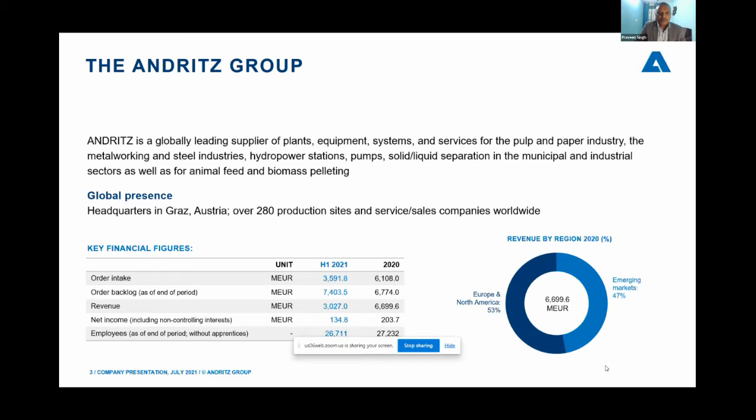Andritz is headquartered in Graz, Austria, and we have over 280 production sites and sales and service companies worldwide. And we did an order intake of about 6 billion last year in 2020, and sales was approximately 6.7 billion globally when we talk about the Andritz Group. So we are mainly operating in pulp and paper, hydro, metal and separation areas.

Pulp and paper is one of the biggest divisions within Andritz, and we have a share of about 48% from pulp and paper. Hydro is about 22%. Metal industry, we do about 19%, and separation about 11%. So this is something about our group and the business areas where we are working.

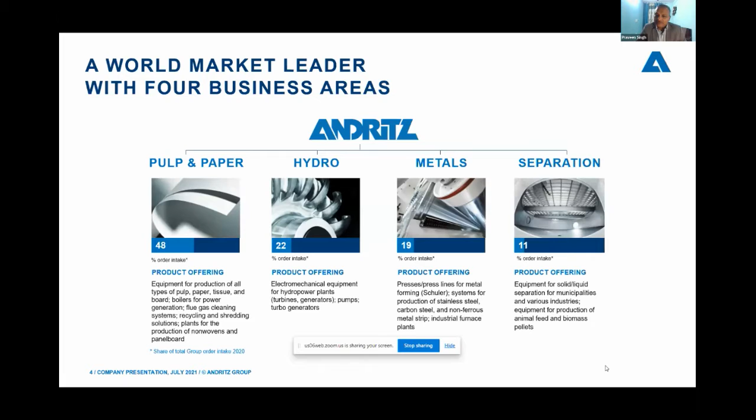The pump is coming under the hydro business area of Andritz, where we also do electromechanical equipment for hydropower plants, turbine generators, turbo generators, hydro turbines, and service and rehabilitation. In pulp and paper, we do everything starting from pulper to finished product, and then flue gas cleaning systems, recycling, shredding solutions, different types of equipment. In metal industry, we do complete stainless steel, carbon steel, non-ferrous metal strip, and industrial furnace plants. In separation, centrifuges, vacuum belt filter presses, this type of equipment.

So since we are here to talk about pumps, how is Andritz helping its customers with innovative pumping solutions? And for your information, all the pumps are IIoT Industry 4.0 enabled. Most of the pumps are equipped with all the sensors required for IIoT, and we have cloud, we have software to connect them and do all types of monitoring.

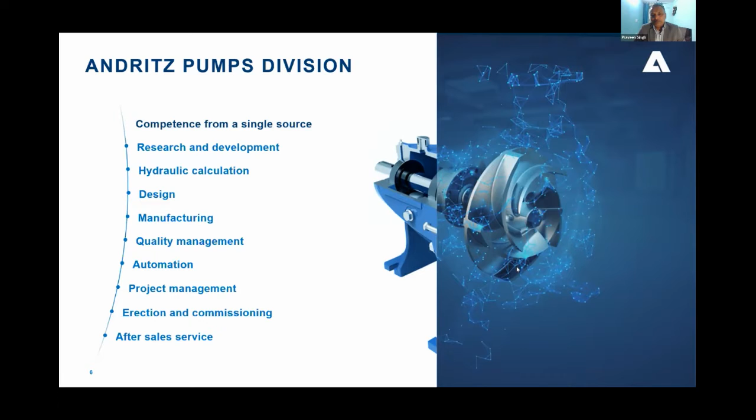So basically, in the Andritz pump division, we have everything from one source, starting from research and development, hydraulic calculation, design, manufacturing, quality management, automation, project management, erection and commissioning, and after sales service. This means we don't have to look to any other organization when it comes to the hydraulics, because we have been doing hydraulics for more than 172 years for industry, and we develop everything from water to wire for pumps or any type of hydraulics like hydro turbines, small pumps or big pumps. All kinds of pumps are being manufactured, from concept till the service. So everything is coming from a single source, and that is basically our strength.

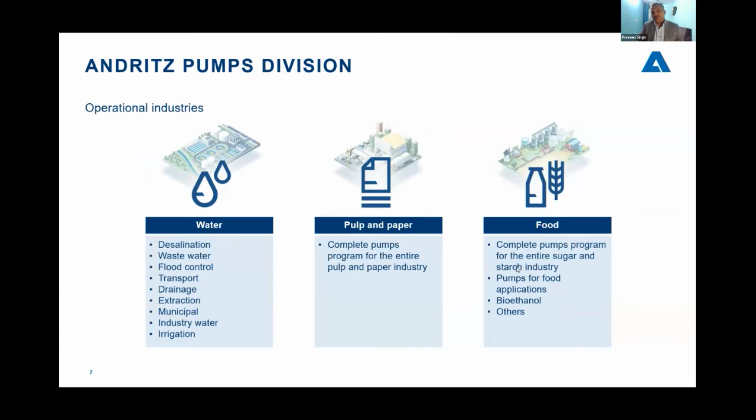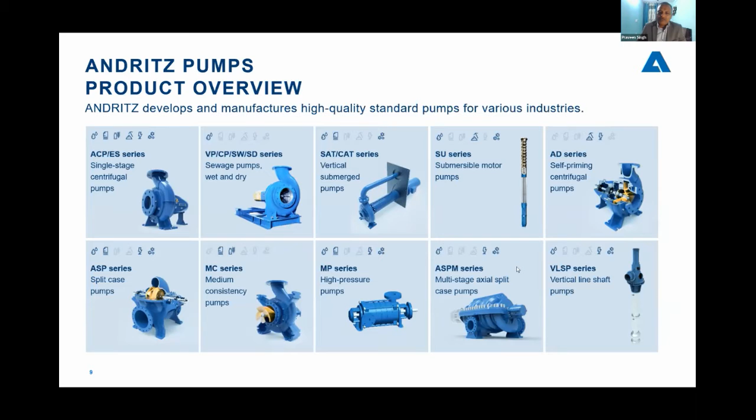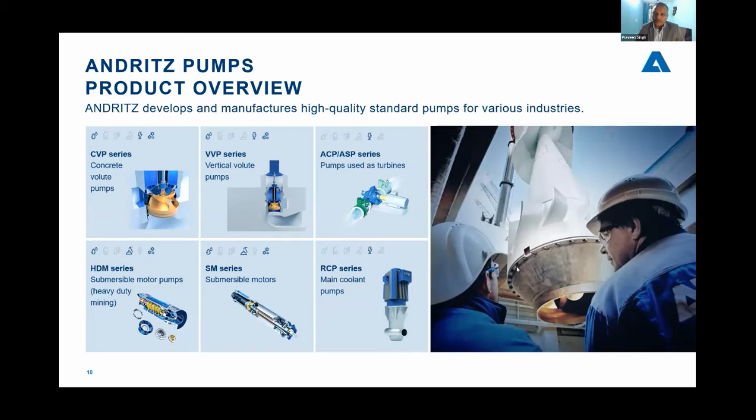So we are operating in many different areas like water, pulp and paper. I will not go into much detail on that. Food, mining, power, other industries also. There is no limit, and we have almost all kinds of pumps used in either industries or municipal areas. So you can see, starting from end suction to vertical pit pumps, submersible pumps, self-priming pumps, ASP, medium consistency, high pressure, all types of VT pumps, concrete volute, or pump as a turbine which runs in reverse direction. Also, we do RCPs, reactor cooling pumps for nuclear power plants, which go directly inside the nuclear power plants. We also call that the main coolant pump, which we developed together with the reactor manufacturer for nuclear power plants.

First, something about the research and development which takes place in Andritz. We do everything starting from design, manufacturing, and model testing. These three are the main dimensions of developing the hydraulics in our state-of-art Research and Development Center.

This center is located in Austria, Graz city, and that is also a National Hydraulic Laboratory of Austria, which does all the hydraulic certification, model testing, and all type of quality testing on behalf of the Austrian government. Within the pump division, this hydraulic laboratory called ASTRO is a different independent organization which does all the testing and certification, and also develops all the hydraulics for the pump division of Andritz.

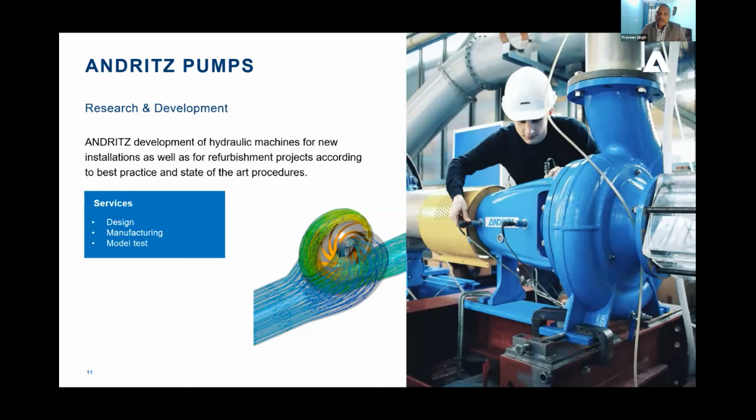So it's not that it's a central organization. We also have this testing center with people from all over the world. We have R&D engineers sitting in India, also in China, also in Brazil, Germany, and of course, headquarters and leadership coming from Austria.

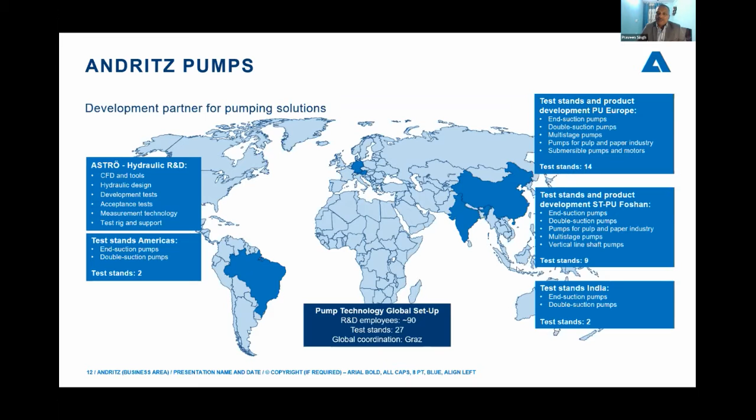So where we do the model testing and different types of hydraulic testing in our laboratories. All the products which are coming are a result of this research and development and laboratories which are located all over the world.

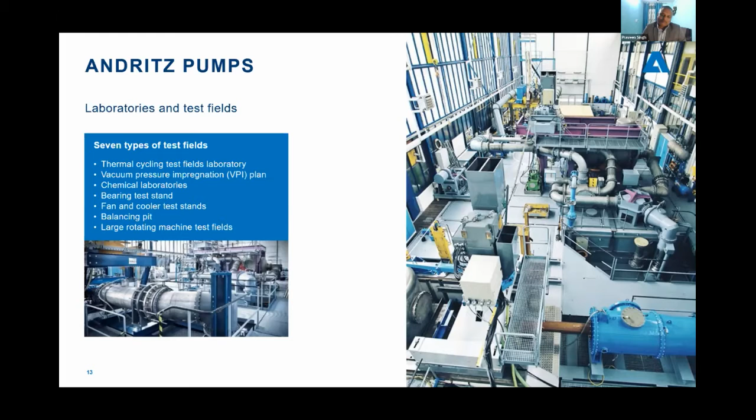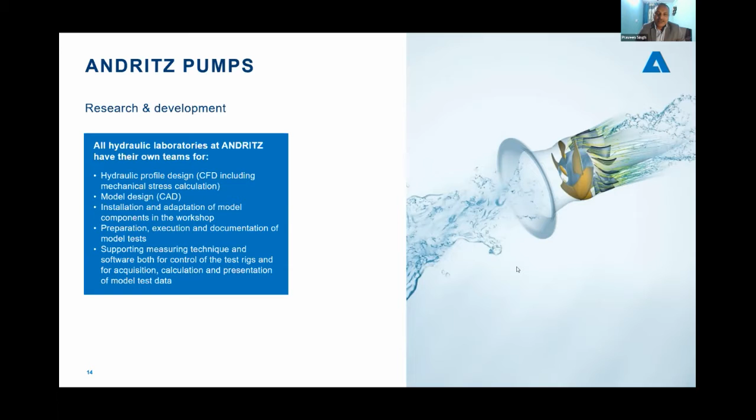That is the backbone of all our hydraulics. And most importantly, I will tell you here that the uncertainties of this test are sometimes 0.000, going to three levels after the decimal. That type of testing uncertainty we are having in our tests.

Okay, so today I'm going to talk about pump operation. We talked since morning a lot about pump priming. And when it comes to operation, the suction condition, when we have to deal with negative suction, we've been hearing about a lot of problems since morning. It's coming when we have to deal with negative suction, when we have to deal with fibrous liquid like sewage or sludge or fibers, stock, pulps, industrial effluent. So we are facing a lot of problems even for clear water application or raw water application.

So why is priming required? Because a pump is a centrifugal machine, we all know, and it cannot work or cannot pump if liquid is not available at the center of the pump impeller. That means a pump cannot suck water. Many people have this misinformation that a pump sucks water, but no, a pump doesn't suck water. It can only pump liquid if the liquid is available at the pump centerline or impeller eye. Then it can do the pumping.

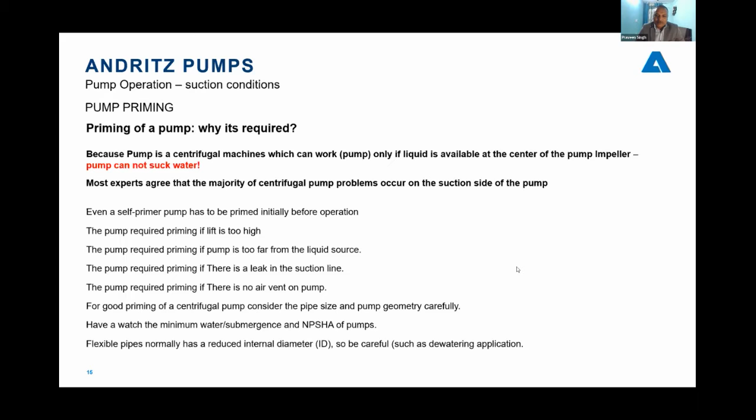We have seen in industry when pumps are not in touch with the liquid, we have to do priming. For priming, we have to adopt different priming methods. Like sometimes we install a foot valve. The foot valve basically stops the water going away from the pipeline and maintains connectivity within the liquid and the pump, and then the pumping is happening.

Another method is if we have an air vent. By that we can suck all the air and bring the liquid near to the pump and do pumping. So that is another method. Suction piping design and proper priming is very important for a pump. Bad pipe design may sometimes cause serious cavitation. Cavitation is another subject which I'm not going to touch today, but priming is very important for any centrifugal pump.

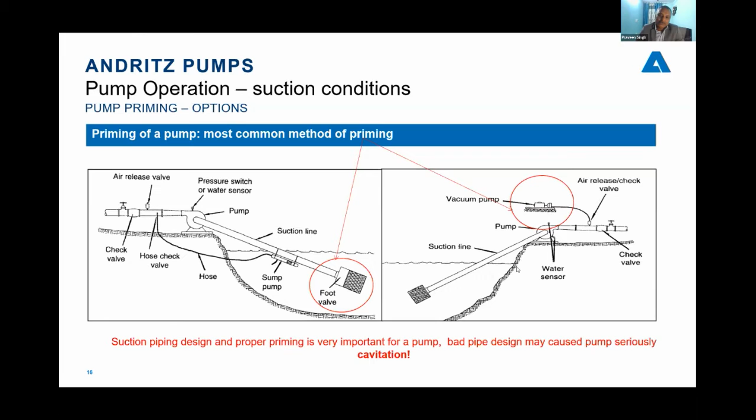Another method for centrifugal pump, which is very common or popular in industry, is to build a priming tank and bring the liquid near to the pump so that it can do pumping. We have to design and modify the suction line, and build a tank there to do the pumping. But of course, the dimensions and everything of this priming tank need to be calculated by the pump specialist.

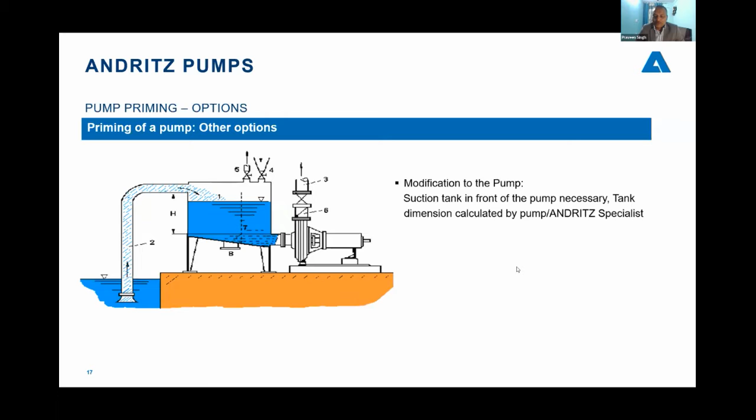And most importantly, we have to deal with the situation where we cannot see what is happening inside the pump. With a horizontal pump, you can see what is happening, where the vibration is, how the pump is running, and maintenance is also very easy for horizontal pumps. I'm not criticizing these 3 pumps, because we also make all these 3 pumps and have them in our product portfolio. But sometimes, depending on the situation, we have to choose from the options.

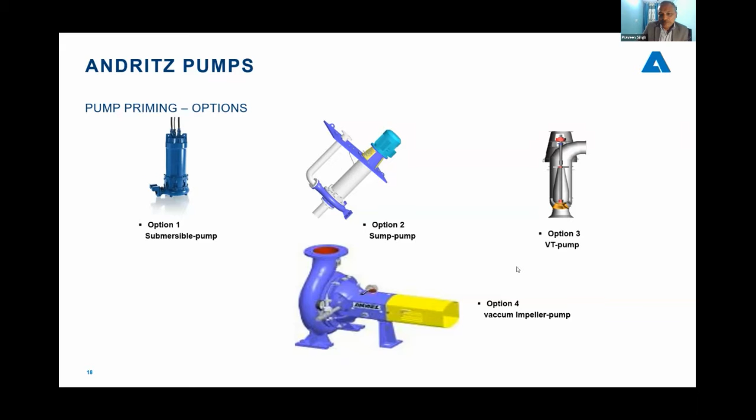For that, I'm today concentrating my discussion on the 4th option, called vacuum impeller pump. I will go a little deeper with this option. Of course this also has some pros and cons, but this is also an innovative solution for industry, or for municipal corporations, or flood situations, or raw water intake, any kind of application. This option is also available from Andritz now. What is behind this vacuum pump impeller? What is in this? Let's go more in detail.

We also call this self-priming feature, because it has an integrated vacuum pump, vacuum impeller. So there's no need to have a separate vacuum pump for priming. Just a little overview about this self-priming type pump: we have all kinds of pressure grades like PN10, PN16, and PN25. We can go head up to 160 meters and Q up to 9,000 cubic meters per hour. Efficiency we have already gone up to 90%, but it depends on the duty condition and hydraulics.

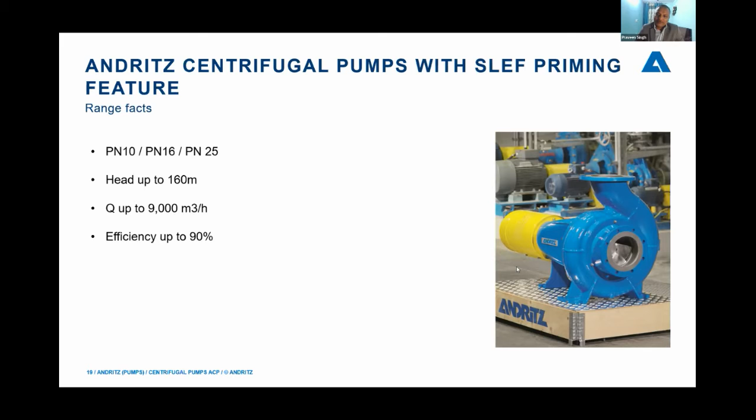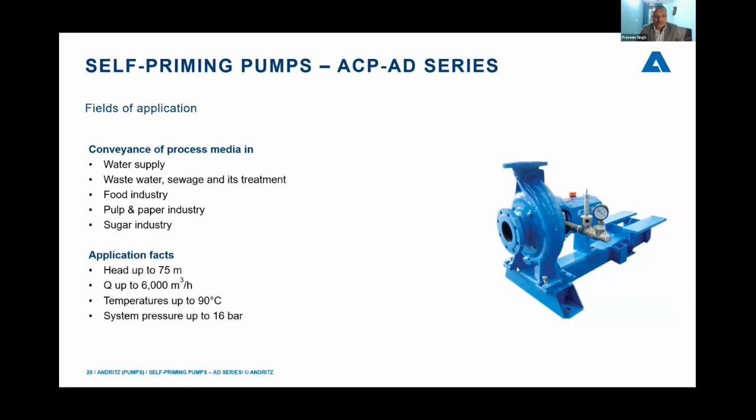Field of application: these pumps can be used in media like water supply, wastewater, sewage and its treatment, food industry, pulp and paper industry, sugar industry. As I already told you, here there is some typographical error, but it can go up to now 9,000 cubic meters per hour.

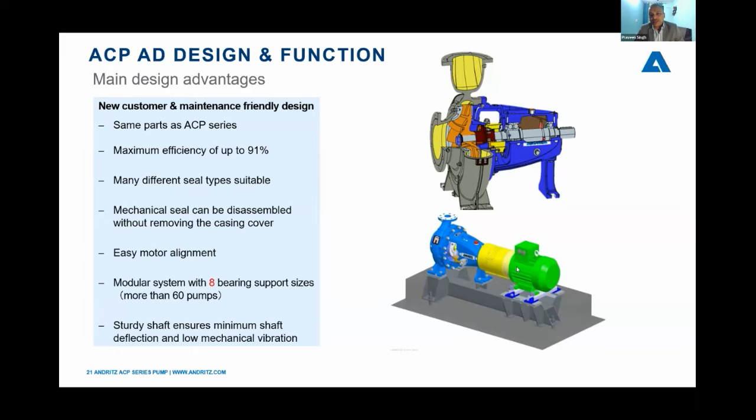A sturdy shaft ensures minimum shaft deflection and low mechanical vibration. This pump also has a feature like a spline shaft with male and female arrangement between the shaft and impeller. So a spline gear shaft arrangement is there for these self-priming pumps.

Different types of impellers are available to choose from. If we have to deal with sludge, effluent, or sewage, we have a different impeller. For slightly contaminated water, we can go for a semi-open impeller, and there also we have different numbers of vanes — 3 vane, 4 vane, up to 5, 6, and even 8 vane impellers in this series. This depends on the application, and we can choose the impeller type that fits the application.

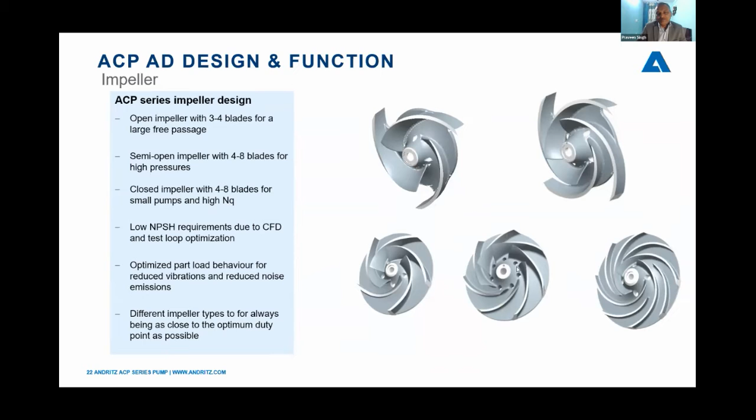So the next is about the construction, how this pump looks like.

If you see here, we have an internal vacuum pump. What we have done is have one main impeller — I will show you the exploded view — but we have an internal vacuum pump on this common shaft, so we don't need a separate external vacuum pump for priming. That is the basic principle of this pump, and it saves a lot of time and space, because installing a different external vacuum pump creates a lot of hurdles during installation.

Then we have an air degassing pipe. This is needed because whatever gases we get from the suction line have to be degassed. This is especially true when dealing with fibrous liquid, which includes sewage, sludge, effluent, or slurry, because when there is contamination in the water, it doesn't come alone — it comes with air inside. Even for pulp or stock in the paper industry, it's a very puffy material, so it has a lot of gases inside too.

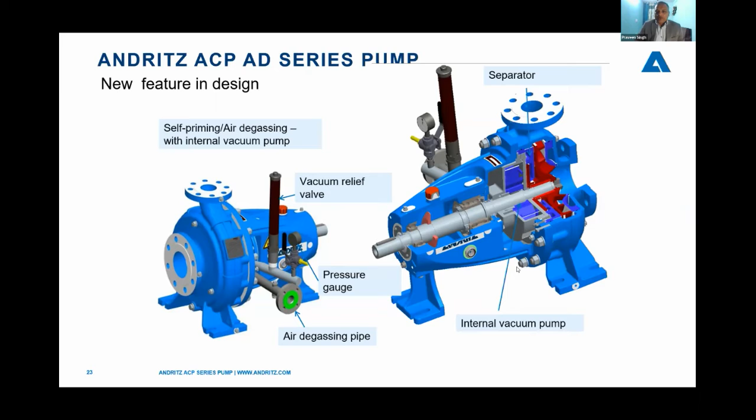This separator is a patented part of this pump — we have got the patent for this separator. This is very unique, and it works as a primary mechanical seal for the volute casing, and this is also sometimes called dynamic sealing.

Praveen, can you hear me? I think there is a lot of breakup at your end.

carbon versus ceramic, balanced, unbalanced, and single, multi-load spring. So the different types of mechanical seal which we are using, all that can be avoided, and we can do the dynamic sealing. That is basically the components.

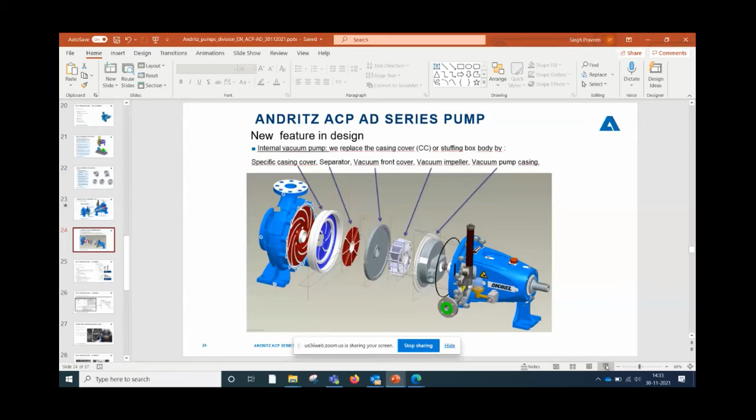Okay, then maybe I will close my video. Then I think it should be improved, right? You will have to reshare your PowerPoint presentation. Right now your sharing has also got discontinued. Okay, sorry. Now it's fine. Sir, Praveen, can you go back one more slide and start all over again? Okay. Yeah.

So we were talking here about the internal vacuum pump which this pump has. By that, we are doing all the priming, and after that, we have a degassing pipe, because whatever air is coming to this pump with the liquid has to be degassed. So it has a different application basically. It has nothing to do with the priming, but this is an additional feature when we have more air content

inside the liquid. So basically, when we are dealing with fibrous liquid like sewage or sludge or effluent or stock or pulp in the paper industry, or also slurry applications, whenever fiber comes in the liquid, it doesn't come alone, it comes with air inside. And sometimes people wonder why fibrous liquid pumps have more cavitation problems.

So cavitation can be avoided with this air degassing system. It can degas all the air which is in the liquid, and then pumping can happen smoothly. Then we have a vacuum relief valve which releases all the air. Then we have a pressure gauge, because we have to adjust this vacuum relief valve pressure so that it can do proper priming. So for that we have a pressure gauge in this pump, and we also have a separator.

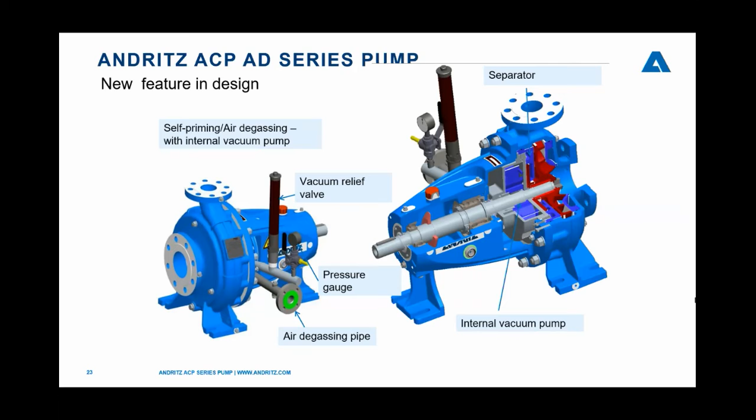a separator in our industry. Its role is to separate all the pumping liquid being pumped through the main chamber from the vacuum pump impeller. So it separates all the liquid, and it does the sealing. It provides the sealing from the pumping media.

Okay, so this is the exploded view of this pump. You can see there is a main volute casing where we have the main impeller of this pump, where the pumping is happening. Thereafter, we have a specific casing cover. Then we have a separator or dynamic sealing, which provides the sealing from the main pumping liquid. And then we have a vacuum front cover, then the vacuum impeller, very small, on the common shaft of this self-priming pump, and then the vacuum pump casing, which seals the chamber where this air is being released.

And then we have a single mechanical seal in this. So what I was talking about, that we need to have the sealing water, because this is a liquid ring vacuum impeller we are having on this pump on the common shaft. So to create the vacuum, we need lubrication for this impeller, and then also we need to lubricate this mechanical seal which is installed at the vacuum pump casing. So basically this sucks all the air, and then it does priming, and then pumping is happening. This is how simple it is.

Another thing which I was already talking about, that whatever the water, service water or lubrication water or sealing water, only one connection you have to give to this pump. So whatever water connection or service water connection you are giving, that water will not go to drain. You don't have to waste that water. You can recollect and reuse or recirculate that same water within this pump. We have developed some system for that, which can recirculate within, or it's basically coming from the seal manufacturer, only a small equipment which recirculates this water and lubricates this mechanical seal, as well as this vacuum impeller also. So this is the basic information about this pump.

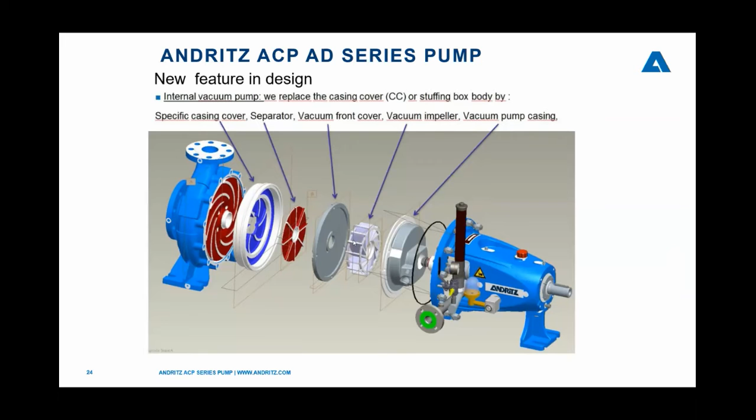So with this, we have already tested with this pump viscous media, that is sugar concentration up to 70%, high solid content media, that is sewage, pulp, paper, or other applications also, clear water, raw water, storm water. We have also tested with wastewater, sludge, and effluent.

So the advantage is easy operation and maintenance of this pump, because you don't have to install the pump deep inside the sump, and this will provide easy maintenance and operation. Self priming saves space and investment cost also, because you don't have to invest in expensive submersible or vertical motors. It allows for more suction height, it can go up to 6 meters, but of course we have to calculate NPSH. Don't forget to do that.

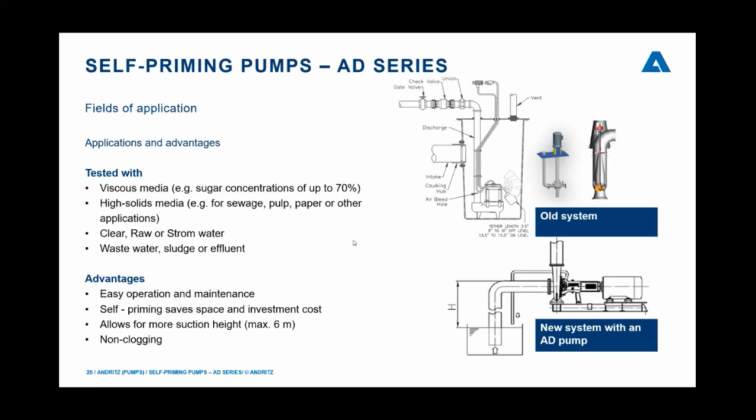And we have a non-clogging impeller also, because as we already saw, we have semi-open, we have fully open impellers, and with different numbers of vanes, so that we can choose which impeller to go with which application.

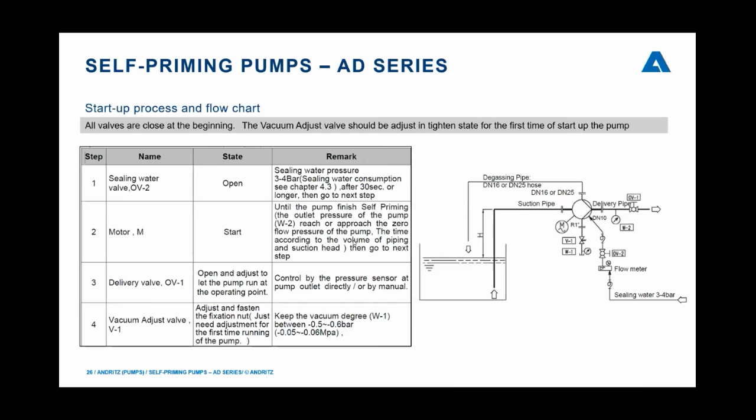Okay, and this is how to start this pump. So first, basically, we have to open the sealing water connection, and then we have to start our motor, then open the delivery valve, and then we have to adjust the vacuum adjustment valve so that we can have the proper pressure and we can do the priming. So this is a very simple startup method for this pump. The single line diagram. And okay, let's move to next.

So I'll share some experiences and references for this pump which is running in India. Because when we talk about any application, people always talk about Indian conditions. That is very important, you know. So these pumps are of course running in Indian conditions. So this we supplied to UP Jal Nigam for tannery effluent pumping in Kanpur. And you should know that we supplied these pumps for the last Kumbh in Prayagraj, at the beginning of 2019.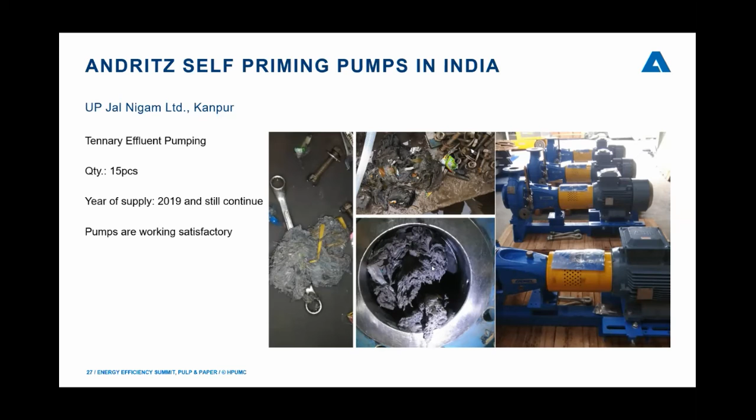So you can see some of the pictures from our test loop in Chennai, where we tested this pump, with the presence of UP Jal Nigam chief engineer. And we have a very sophisticated, very advanced test loop in Chennai, where we can do the testing with one single person sitting at the computer. He can operate the whole test loop. No, there is no human interface.

All the data can be collected automatically, and we have a data acquisition system which generates an automatic performance curve. So there is no human interface, no error possibility, and most importantly, I would like to share here, this is the test loop where we have no interface even from the motor on the pump testing.

What is different in testing the pump with the motor and without the interface of the motor is: normally how we do the test is we get the type test result of the motor from the motor manufacturer, sometimes new, sometimes 5-year-old, and that type test result, power factor and efficiency, we take from the motor manufacturer type test result, and then we derive the pump efficiency by current measurement.

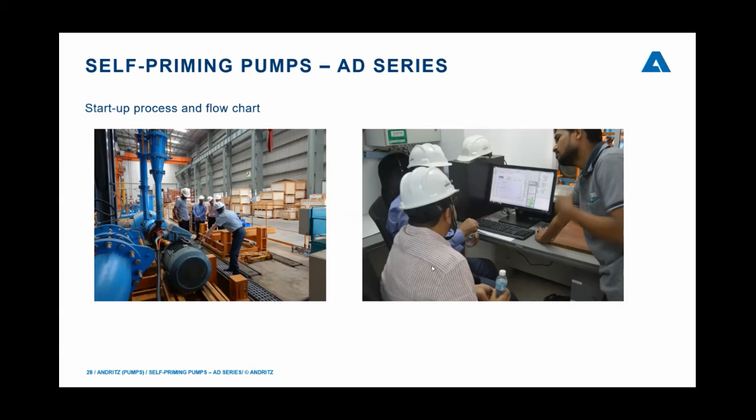There was no problem once we opened the pump after 1 week of operation, because there was a lot of thick material inside the pumps. The same type of this pump is also running for stock and also for the causticizing plant in Century Paper Mill, and we have about 6 pumps together with 200 other pumps which are running since 2009, and still it's working and working very satisfactorily.

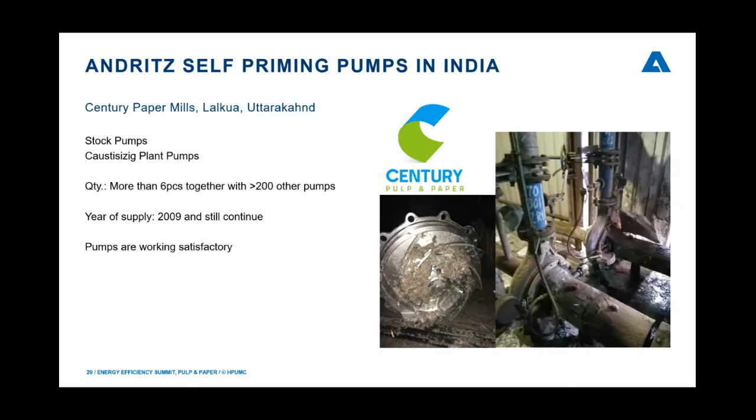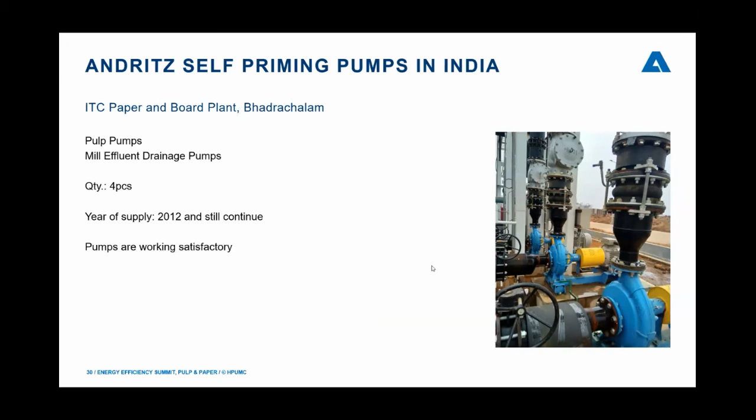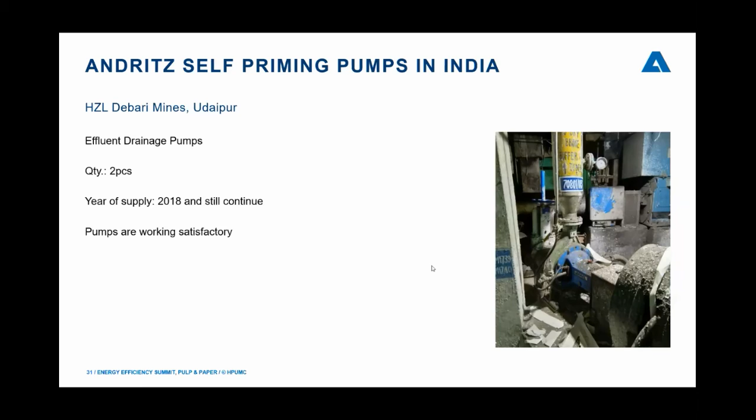We have such pumps installed in ITC paper and board mill in Bhadrachalam for pulp and also for mill effluent drainage pump. So 4 numbers we supplied in 2012 and still running. We have the same kind of pumps installed in Hindustan Zinc, Debari mines, Udaipur, where we have supplied these pumps for effluent drainage. 2 pumps only, but running since 2018, no problem. Then we have some other references in India.

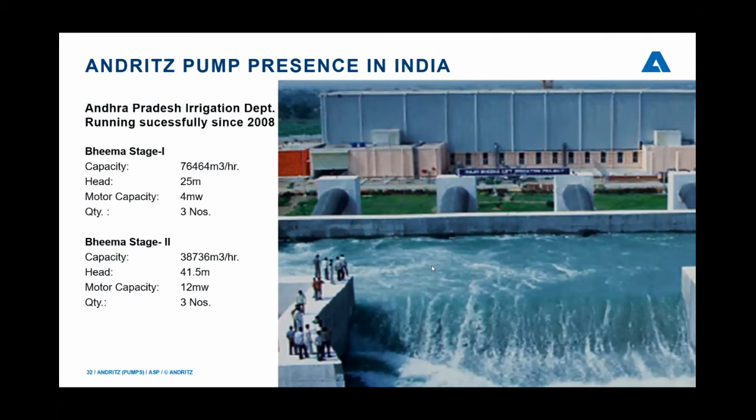We don't only do these small pumps, but we also do very big sizes of pumps. Like we supplied Bheema Stage 1 in Andhra Pradesh for irrigation projects in 2008, where we have 3 pumps of 4 megawatt running since 2008. All well. Bheema Stage 2, 12 megawatt pump, 3 numbers running well.

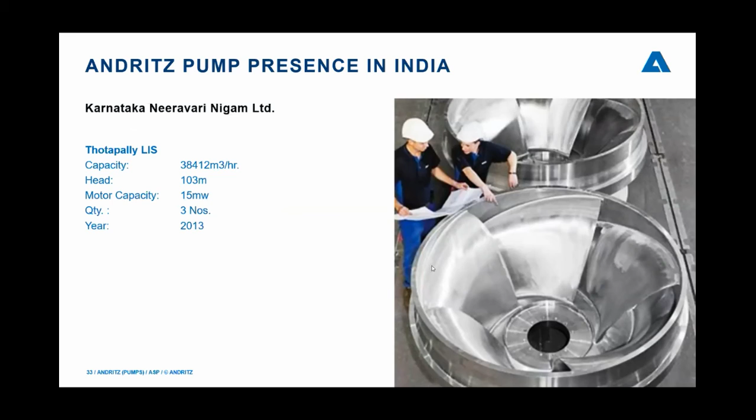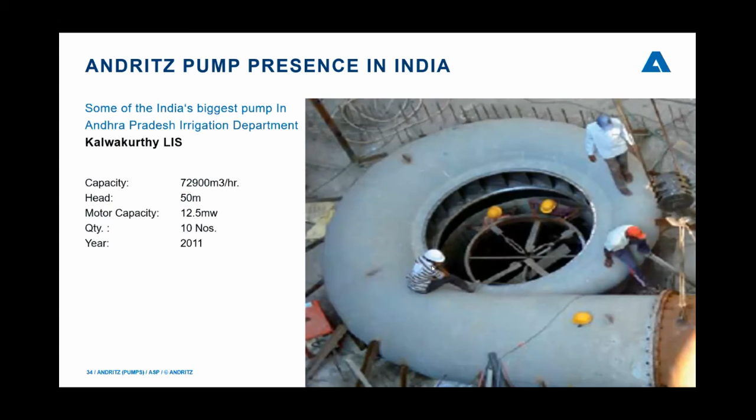Then Karnataka Neeravari Nigam Limited, these pumps we supplied in Thotapally lift irrigation scheme, 15 megawatt, 3 pumps in 2013, all well. We supplied also for Kalwakurthy, about 20 cumec and 50 meter, 12.5 megawatt, 10 pumps in 2011, all working well.

Then something about the Bahubali pump. So, there was a big advertisement 2 years ago in all the newspapers when about 7 state ministers, chief ministers gathered to inaugurate these pumps, which were called Bahubali pumps in Telangana. So that is for Kaleshwaram lift irrigation scheme. So in Kaleshwaram, most of the big pumps belong to Andritz. Kaleshwaram stage 1 and stage 2.

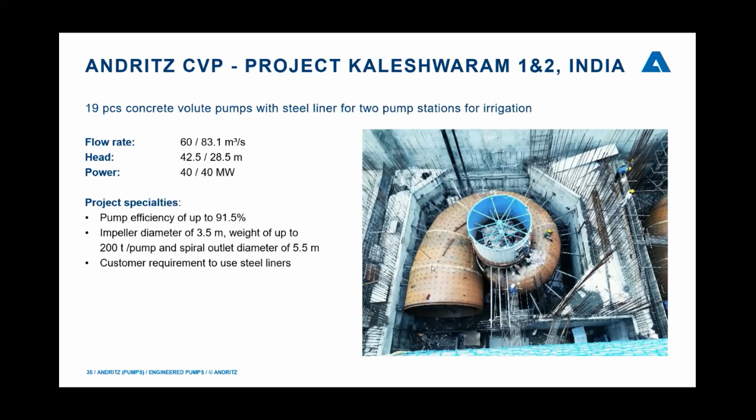19 pumps of 60 and 83 cumec, and motor power is 40 and 40 megawatt for both the pumping stations. Efficiency up to 91.5%. Impeller dia was 3.5 meter, and weight of pump was 200 ton. Outlet diameter was 5.5 meter. So these pumps are also already commissioned and running. Then Kaleshwaram 12 and 14, we have supplied 31 cumec and 35 cumec, head up to 107 and 66 meter, 40 and 34 megawatt pumps.

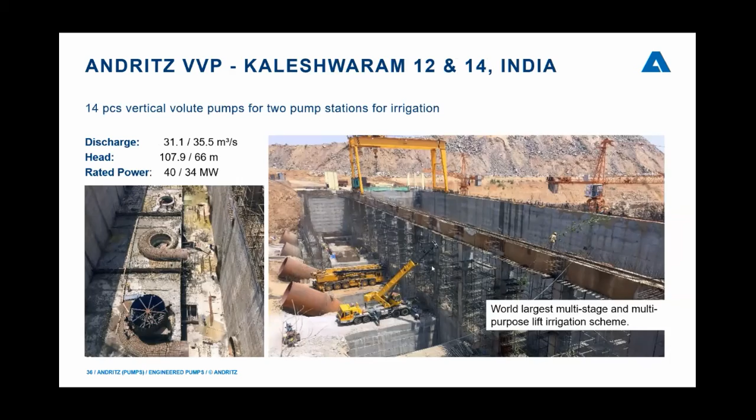So such experience is there with Andritz with this innovative solution of self-priming pump for your application. And here is our contact. Any question? I'm open for that.